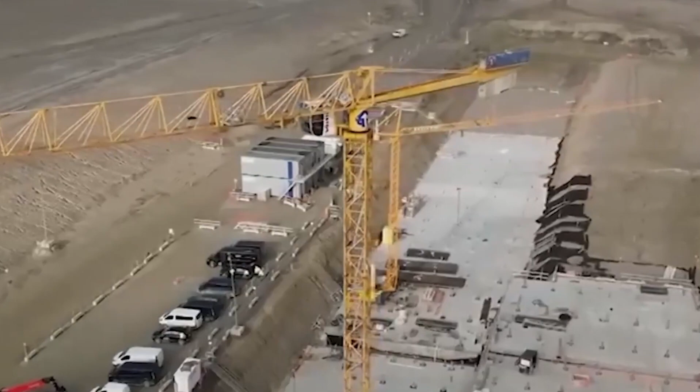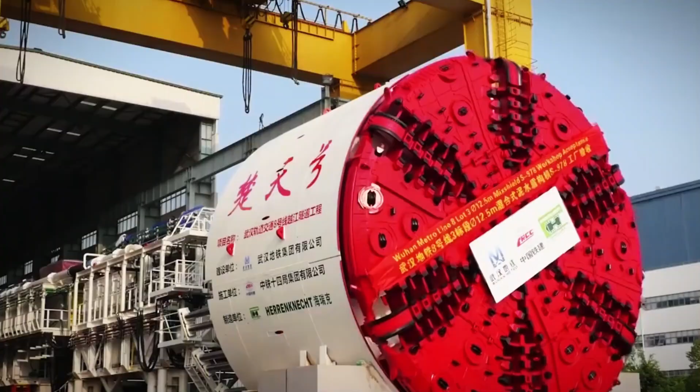Beneath the turbulent waters of Asia's most unpredictable river, a silent revolution took shape, one that shattered records, defied limits, and turned a city's greatest nightmare into its most daring triumph. At first glance, it sounds like fiction, a colossal underwater highway built not in years but in a mere 110 days. Yet this isn't just a story of speed. It's a masterclass in precision, defiance, and raw engineering brilliance.

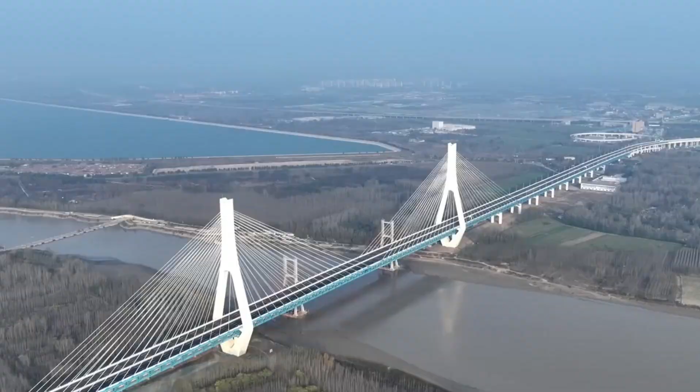What sparked it wasn't just ambition, it was survival. What followed wasn't luck. It was something far more calculated. Hidden within this feat is a move so audacious, so counterintuitive, it forced engineers to abandon everything they knew about bridges and dig deeper than ever before.

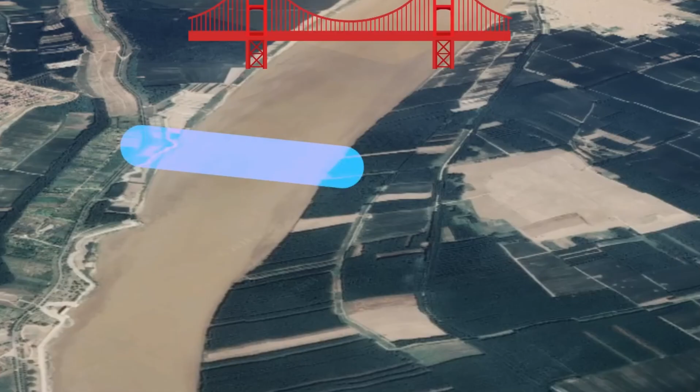When the surface betrays you and time is your enemy, what do you build? In the heart of China, one city found its answer not above the river but beneath it. And what they created down there, you'll have to see it to believe it. The crisis that forced a megaproject into existence.

For years, Jinan's traffic was among China's worst, a paradox for a booming economic hub in Shandong province. By 2020, the city streets, built for a fraction of its current population, choked under 3.5 million vehicles. Gridlock wasn't just an inconvenience, it was an economic stranglehold, costing an estimated $2.3 billion annually in lost productivity, wasted fuel, and supply chain delays.

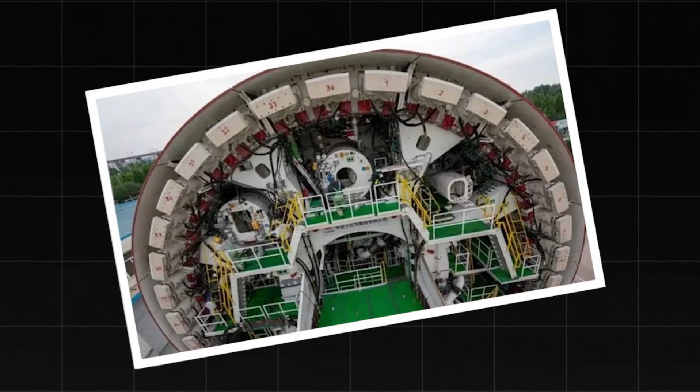The Yellow River slicing Jinan in two became the city's cruelest bottleneck. Two outdated bridges, never designed for modern traffic, turned into parking lots during rush hour. Accidents, weather, a single hiccup triggered citywide paralysis. The stakes were existential. Jinan's northern districts, ripe for industrial parks, logistics hubs, and housing, remained cut off from the urban core. Investors hesitated. Growth stalled. The city needed a solution not for today, but for decades ahead.

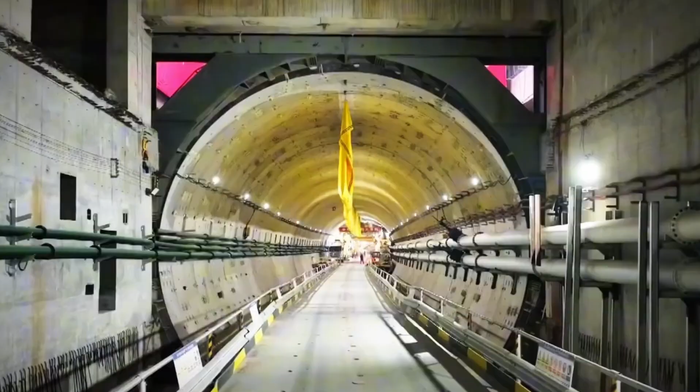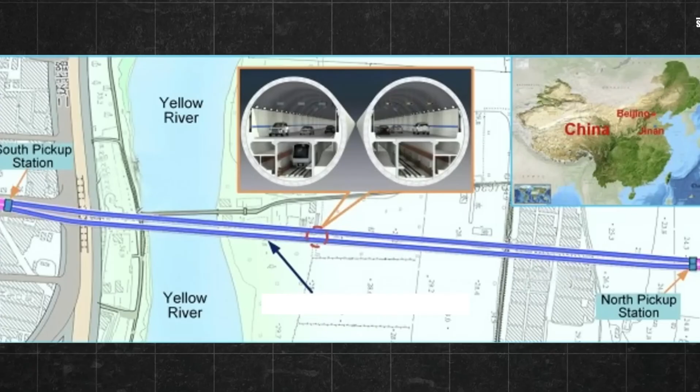After years of studies, one radical idea emerged, a massive underwater highway tunnel capable of moving tens of thousands of vehicles daily without touching the river's surface. By 2023, the plan wasn't just a blueprint, it was a countdown to revolution. But one question lingered: why not just build another bridge? Why a bridge would have been a disaster.

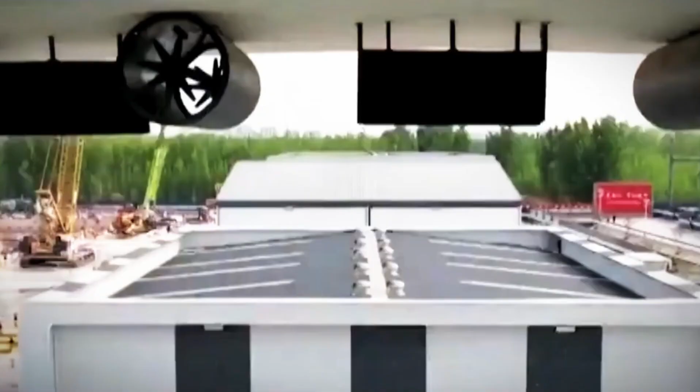On paper, more bridges seemed like the obvious fix. But the Yellow River, nicknamed China's Sorrow, had other plans. Its banks were geological nightmares, shifting violently with seasonal floods. Anchoring a new bridge was nearly impossible without risking collapse. Worse, much of the river was a protected ecological zone, home to 160+ fish species. Dredging for bridge foundations would have triggered an environmental catastrophe and violated strict national laws.

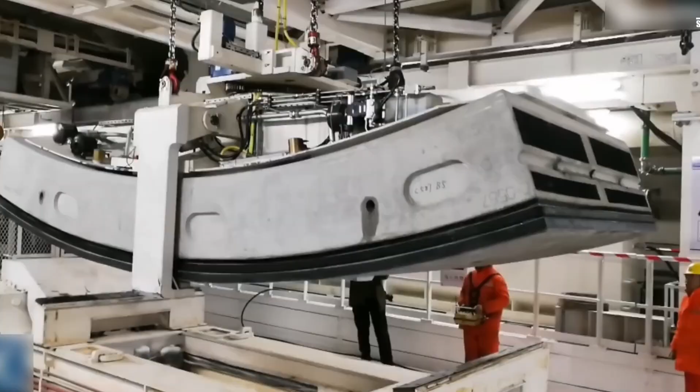Then came the human cost. The only viable bridge paths cut through densely packed neighborhoods, demanding the relocation of 240,000 people. The price? Billions in compensation, demolished homes, and political fallout. Faced with impossible trade-offs, Jinan's planners realized the solution wasn't above the river, it was under it. A tunnel could bypass the chaos, leaving ecosystems untouched and communities intact. It wasn't just bold, it was the only way out.

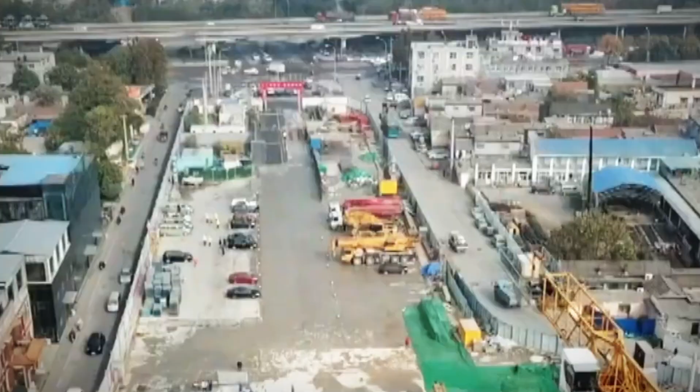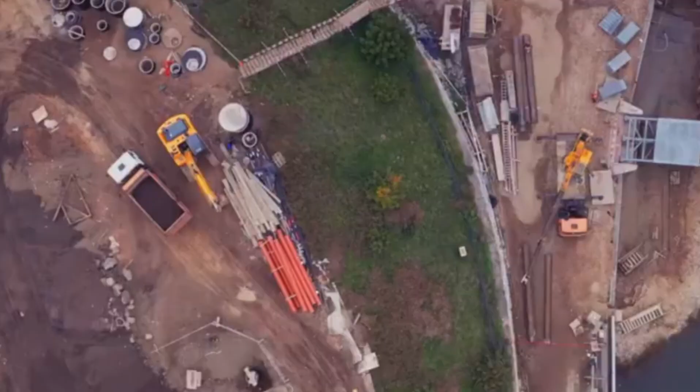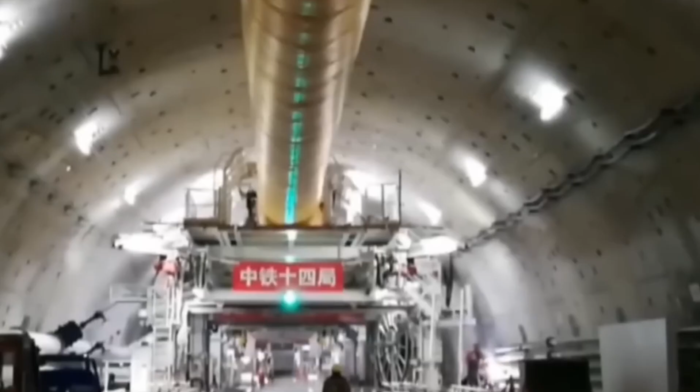The underground revolution. Inside the double-decker wonder beneath the Yellow River's restless currents lies an engineering masterpiece that defies conventional tunnel design. Engineers didn't just build a passage, they created a vertically stacked transportation ecosystem, packing two independent three-lane highways into a single gargantuan bore. The upper and lower decks operate as synchronized unidirectional roadways, their opposing flows eliminating the deadly risk of head-on collisions while doubling capacity. Smart systems transform this subterranean highway into a living organism.

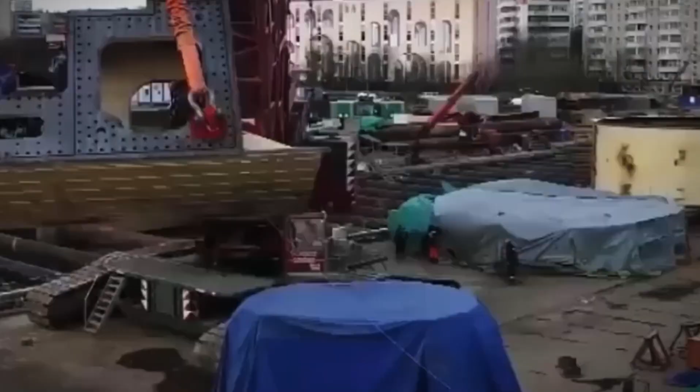AI controllers constantly analyze traffic patterns, dynamically adjusting vehicle flow to prevent congestion before it forms. The tunnel breathes through a network of massive ventilation shafts, while thousands of daylight-simulating LEDs combat driver fatigue during the 3-minute underwater crossing. Safety reaches new heights with emergency escape corridors suspended safely above potential flood levels, accessible every 200 m via crush-resistant stairwells.

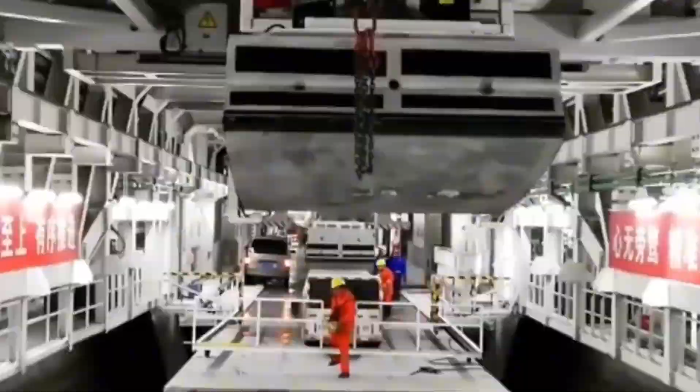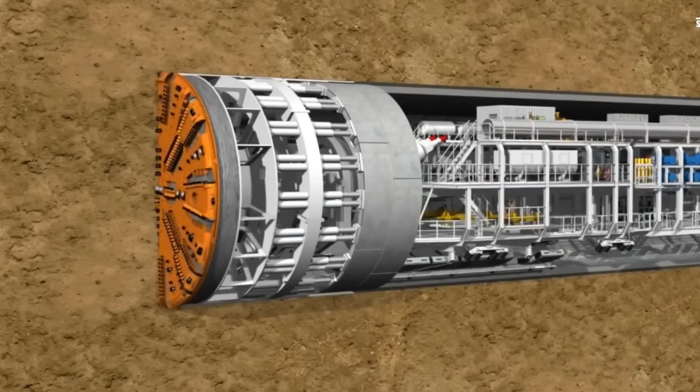The true marvel lies in its backbone, a central composite spine engineered to absorb the river's constant assaults. This revolutionary load-bearing core distributes immense hydrostatic pressures while dampening seismic vibrations, its flexible design allowing the entire structure to sway slightly with Earth movements. Every component, from the nano-coated concrete walls to the vibration-dampened expansion joints, works in harmony to create what might be the most advanced underwater roadway ever conceived. Not just solving today's traffic woes, but future-proofing the city for generations to come.

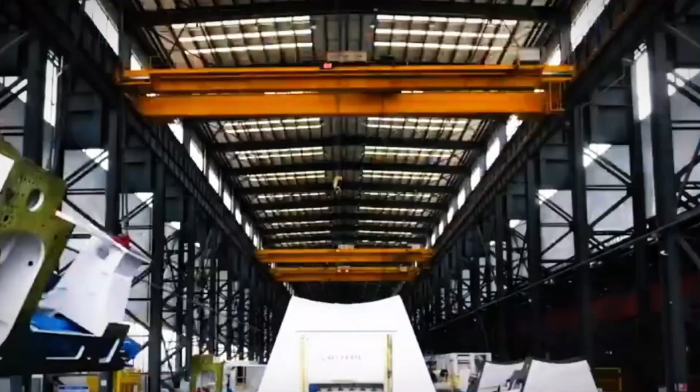Engineering against the clock, the 110-day underwater miracle. When engineers announced they'd burrow beneath the Yellow River in just 110 days, skeptics called it impossible.

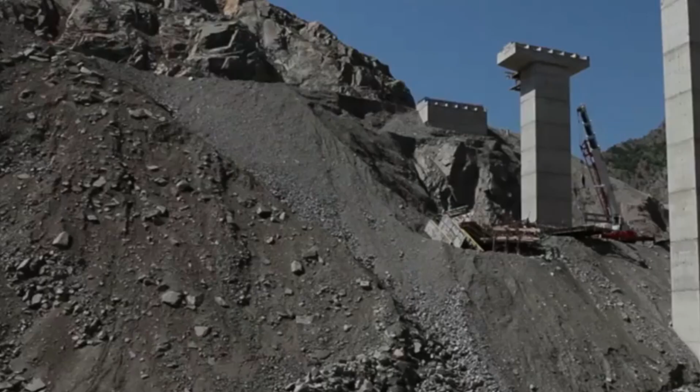Then came Shan-Hai, an 80 million mechanical titan built specifically for this David versus Goliath challenge. This 17.5 m wide behemoth packed 7,510 horsepower of raw tunneling power, its 800-plus sensors creating a real-time nervous system that made micro-adjustments before humans could blink.

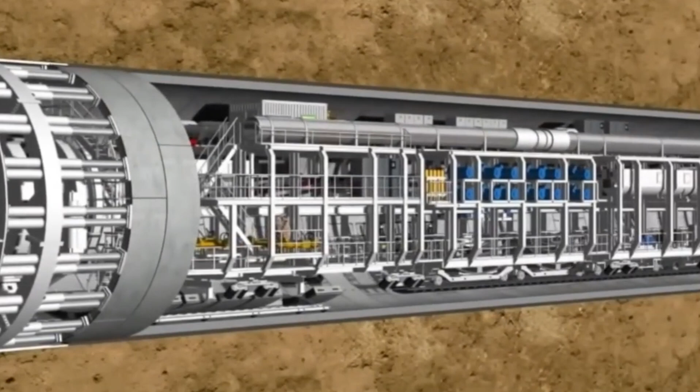The river fought dirty. Unstable soils turned liquid. Hidden granite formations appeared without warning. Quicksand threatened to swallow progress. But Shan-Hai answered with foam injections that solidified treacherous ground and an AI brain that recalculated strategies in milliseconds. When a massive boulder blocked the path, the machine adapted in seconds, a fix that would have stalled human crews for hours.

By December's end, the impossible became reality, 3,290 m of pristine tunnel carved beneath one of Earth's most temperamental rivers. The world record wasn't just about speed, it was about proving that with the right combination of cutting-edge technology and human determination, even nature's most daunting challenges can be conquered on an unprecedented timeline.

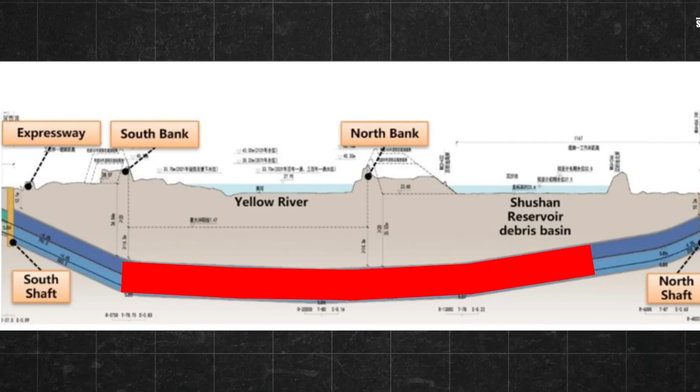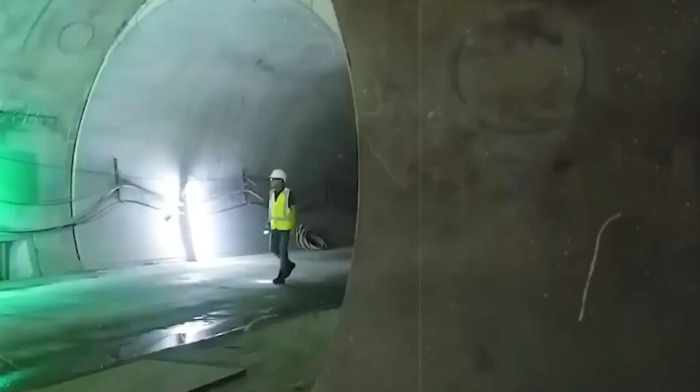The river's fury meets human ingenuity. Nature threw everything it had at this project, and engineers responded with equal force. The Yellow River's shifting sediment transformed entire sections into treacherous underwater quicksand, while crushing 7.5 bar pressures threatened to implode the tunnel at its deepest points. When hidden water channels burst through the work site, crews raced against time to deploy emergency seals before the river could reclaim its domain.

Each challenge sparked brilliant countermeasures, foam injection systems that stabilized unstable soil like geological glue, laser-guided ring placement accurate to within the width of a pencil lead, and an unprecedented 98% material recycling rate that turned excavated earth into new infrastructure. What began as a construction project became something far more dramatic, a relentless, high-stakes battle of wits against one of Asia's most unpredictable waterways.

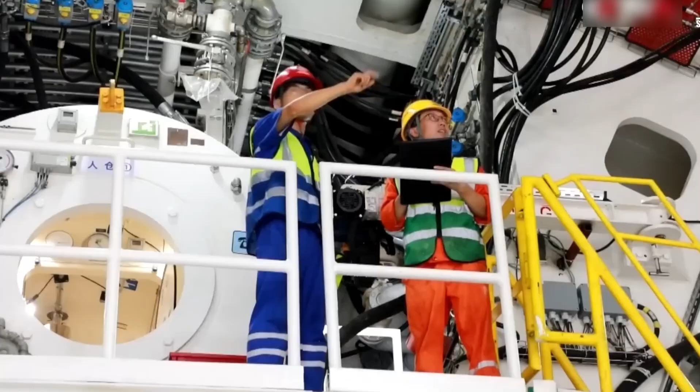In the end, the river met its match. Through sheer engineering brilliance, Shan-Hai didn't just survive the Yellow River's wrath, it emerged victorious. Proving that even nature's most formidable obstacles can be overcome with enough innovation and determination, the tunnel stands today not just as infrastructure, but as a monument to humanity's ability to outthink the elements themselves.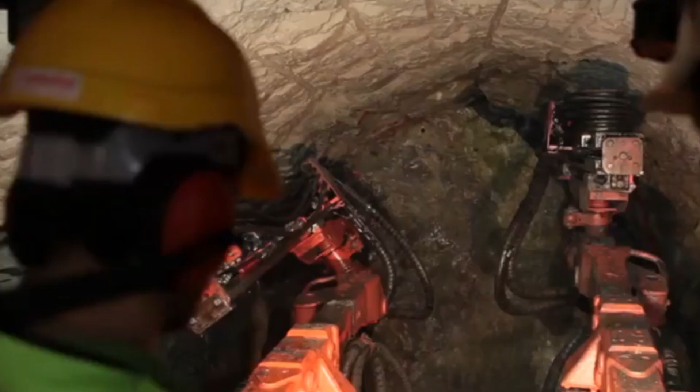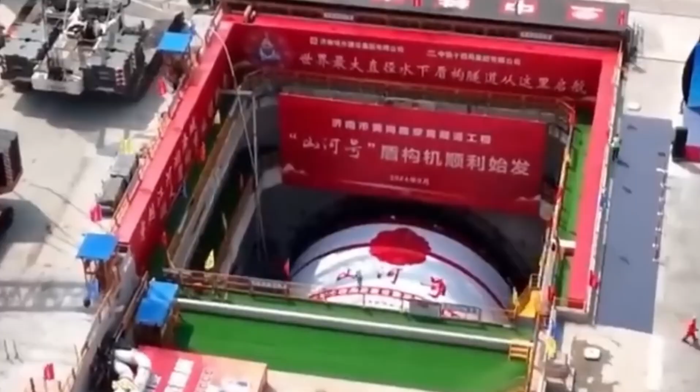The legacy, 43 game-changing innovations that redefined modern engineering. This mega-project didn't just break records, it completely rewrote the engineering playbook, generating an astonishing 43 groundbreaking patents that are already transforming global infrastructure. At the heart of its legacy lies revolutionary concrete technology that defied conventional curing times, hardening 30% faster while maintaining exceptional strength. A breakthrough that shaved critical days off construction timelines.

The tunnel's true genius revealed itself through AI-powered precision systems that operated with almost clairvoyant accuracy, automatically adjusting torque and pressure in real time to prevent jams and keep the massive TBM boring forward without interruption. Its unprecedented 17.5 m width didn't just set a world record, it established an entirely new paradigm for underwater infrastructure, proving that wider could indeed be smarter when engineering two stacked highways within a single bore.

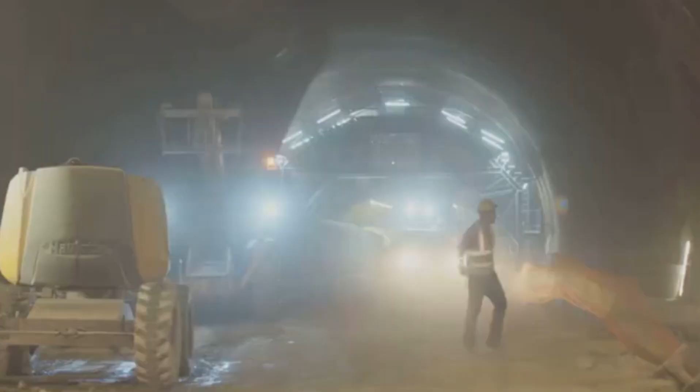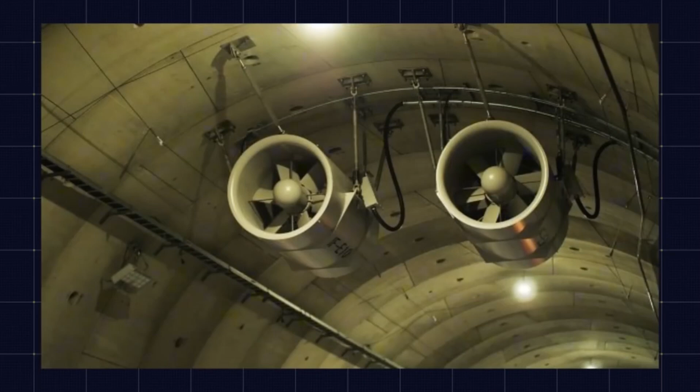Beyond raw engineering prowess, the project pioneered eco-conscious construction methods that redefined sustainable mega-projects. With patented sediment control systems and waste reduction techniques minimizing environmental impact, its next-generation safety protocols, from advanced fire suppression to emergency ventilation systems, have since become the gold standard for underwater infrastructure worldwide.

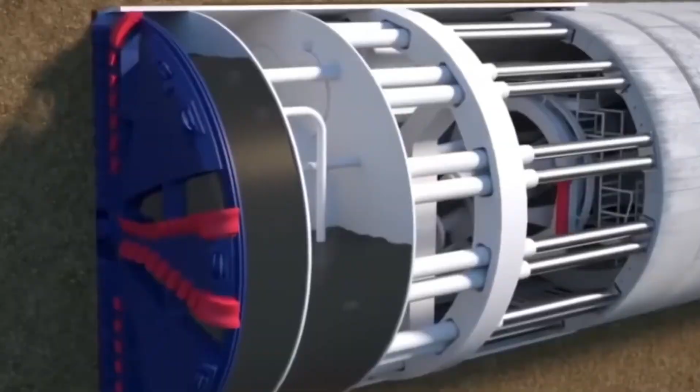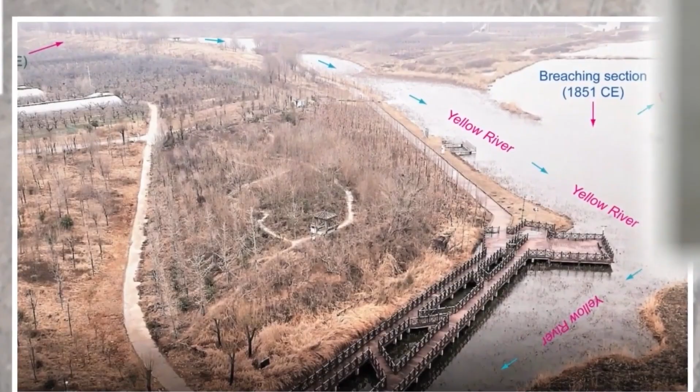These innovations collectively represent more than technical solutions, they form a blueprint for 21st-century urban development. The AI algorithms that maintained construction momentum, the materials science breakthroughs that enabled rapid building, and the operational strategies that conquered impossible deadlines have all become case studies in modern engineering.